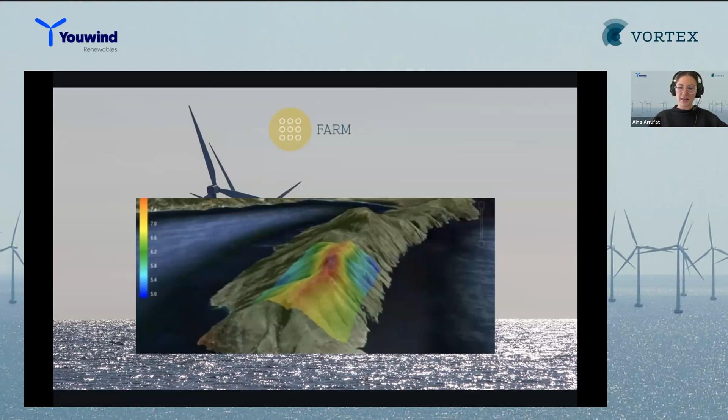This is our general portfolio where we can see that Vortex offers solutions for all the different stages of the project. And then let's move to Farm. Okay, our Farm, it's a wind resource grid at 100 meters resolution, perfect to use when the wind farm area is already selected, but not yet the turbine locations or their class. Let's see now a short video in the next slide.

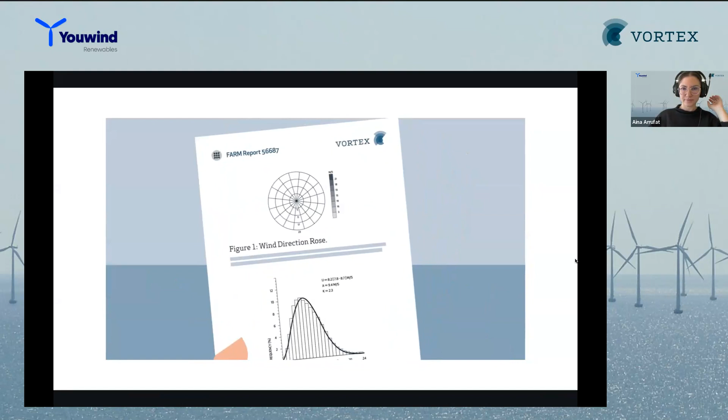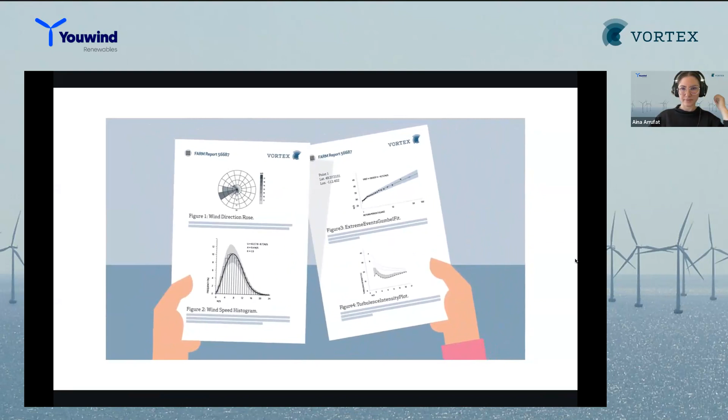Find out, using trustworthy data, which is the best site to channel your efforts and capital. Vortex offers high-resolution maps that include wind roses, wind speed histograms, and turbulence and extreme wind speed data at an unlimited number of points within the area. How? Through Vortex interface. Online, direct to your desktop. No software download required.

Click on New Farm, enter the coordinates, select the resolution, adapt the area, and submit the run. Once the calculation is ready, just click on Run, New Layer, Variable and Type, and then click Request. After just a few minutes, your layer will be ready to visualize and download in ASCII, TIFF, WRG, or KML format.

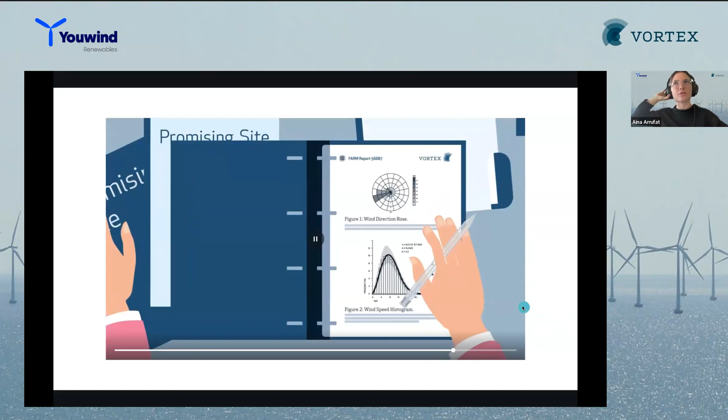So, well, the main important points for the Farm is that it's a WRG file that you can directly open with platforms like Youwind. All heights included from 50 meters up to 300 meters, 16 sectors wind direction rose, 100-meter resolution, characteristic turbulence intensity distribution in speed bands, areas up to 4,000 square kilometers in our Farm Standard, Farm Large, and Farm Extra.

And then this product can also be calibrated with measurements through our 3D remodeling technology, with measurements at different points, 1 turbine, 2 turbines, even 3 turbines, even different hub heights from turbines. And then the phrase to summarize the Farm is that it's a WRG file which characterizes the wind field gradients to compute the mean AEP. Then let's move to Series.

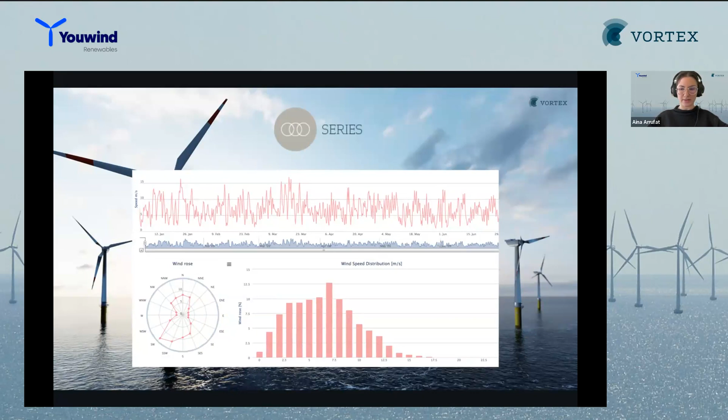Okay, Series is one of our classic products, hourly and 3-kilometer resolution, to use when local measurements are already available and long-term extrapolations are required. I have also a short video that shows Series. Maybe I will not keep all the video.

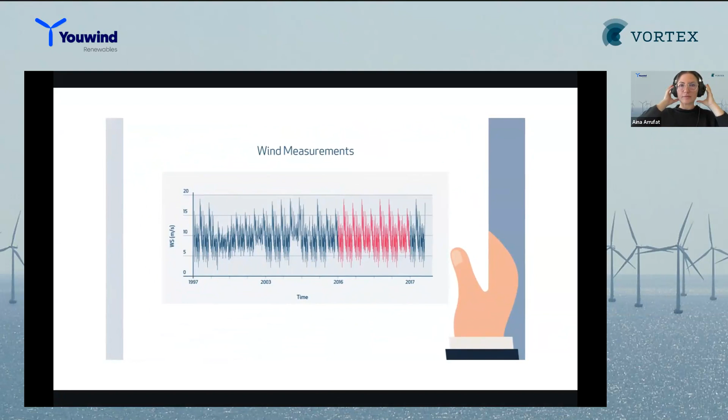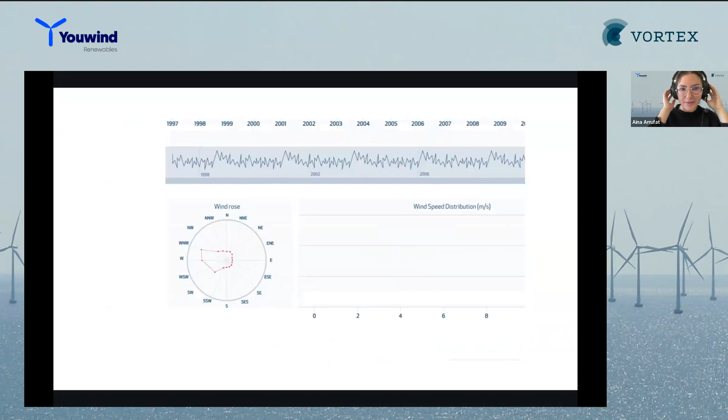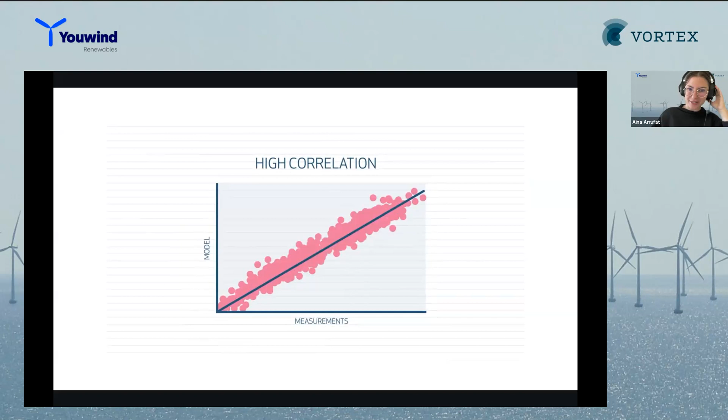Do you have 1 year of wind measurements but need a long-term view? Vortex offers up to 30 years of hourly time series of modeled wind data. Up to 30 years time series, modeled data, wind speed distribution, and different heights up to 160 meters. MCP method included in one series through Vortex interface, available worldwide.

Yeah, and this is the same process, you can directly download and request the series through the Vortex interface. So the main points for Series will be that the resolution is 3 kilometers and hourly. Periods available are 10 years, 20 years, and 30 years. We offer a 6-month free trial through our interface, and the selectable source can be NCEP, NASA, and ECMWF, and we offer these 6 months for free to check the correlations against your measurements.

Variables included are wind speed, direction, temperature, and pressure, and then the remodeling, which is the Vortex MCP, that can be requested directly also from the interface. And to summarize, Series contains the annual and seasonal variability that modulates the AEP along years and months. And then let's move to the last product, which is the LES.

Oh, sorry. LES, it's the most measurements-like set of synthetic wind time series to use to characterize the mean wind and turbulence across the wind farm. Now, I have also a video that shows LES. We have subtitles here.

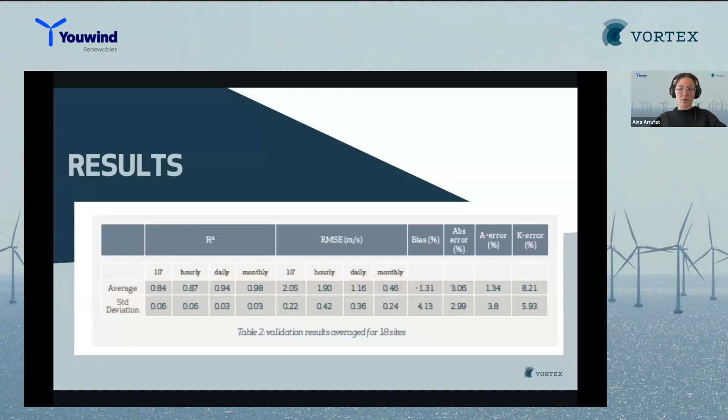And then from the Vortex side, that will be everything for today. And then let's move on with our colleagues from Youwind. Thank you very much. Thank you, Aina. Edvald, when you like. Sure. Thank you very much, Aina.

Very informative presentation, especially around the Vortex products and especially around the validation and calibration of your products. I think it's quite an informative package you have on your website regarding the calibration report and the different products, both for onshore and offshore. So I would encourage all the wind resource specialists to have a look there and see how that stands out for the various projects that you're working on.

So what I'll do now is share my screen here, and I will present some information about Youwind and how we use the Vortex products within our platform. So I'm joined here by my colleague Peter. Peter, feel free to jump in whenever I forget to say something about our product or the data sets. It's a lot of things to cover over a short amount of time, so there could also be some questions along the way.

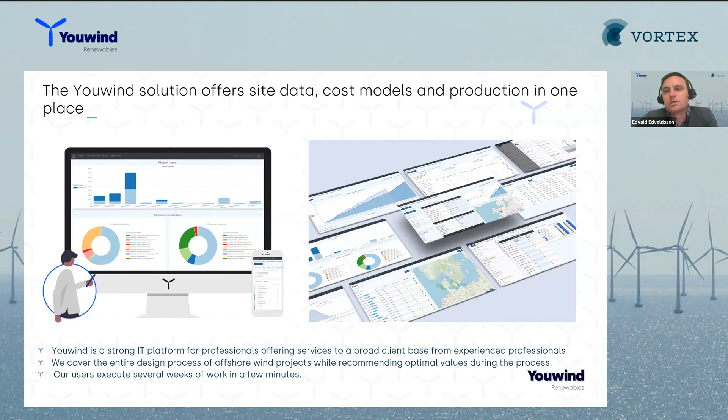And our basic users are able to generate yield estimates and overall project estimates over different sites in a matter of a few minutes up to hours, when normally this takes many resources and can take up to a few weeks. That is done today. I'll focus today on Pixel and Pixel Park.

So Pixel is our early stage screening tool, where you can basically accelerate your early stage screening with our interactive visualization platform. So essentially, it means that you can draw up a very big polygon wherever you want in the world. We will combine data sets from Vortex, meaning if you have access to the Vortex platform and have purchased some of their products and want to use them directly, you can see and screen directly where is the best place for you to have the wind farm set up.

And the most important thing actually for offshore wind farm development is wind speed. Without that, you don't have anything. It's like when you're trying to cook Spanish paella and you don't have rice. The wind speed is the most important aspect of your offshore wind farm project. So this is one of the things that we are very focused on.

So when you have a very big polygon, you want to analyze a very large seabed area, you can simply split the polygons up into very small pixels, as we call it. We will then generate the wind resource. We'll calculate the wind resource at hub height. We'll gather the bathymetry. You can add ground conditions and other human environmental restrictions into your analysis.

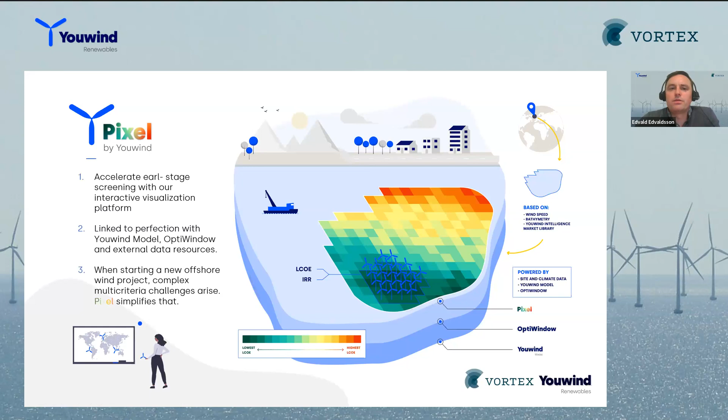And then we will calculate the levelized cost of energy and IRR for different locations. And from there, you can also jump directly into generating a layout and calculating your wake losses, and then continue with your analysis moving forward. So we're talking about LCOE, so levelized cost of energy. Levelized cost of energy is the lifetime cost of your energy project, essentially divided by how much electricity it has generated in the lifetime.

So cost and electricity generation are the most important aspects, and therefore the wind speed is obviously very important, but also other losses such as wake losses, electrical losses, availabilities, and the overall upfront cost of the capex, and the opex, the operational cost, also play a very important role when you're looking into offshore wind farm development. So the key consideration factors are obviously the wind climate, the wind rose, the different wind speed variations,

and the turbine spacing. And we'll go through how we generate a layout with an appropriate turbine spacing, so you can minimize the wake losses in the offshore wind farm project. The overall layout is basically dictated by trying to maximize the production, minimize the construction costs, and minimize losses at the same time, and you're obviously trying to meet the planning criteria.

So we'll show you how this works inside the platform itself, but basically when you're developing a wind farm, you need to take into account not only the wind speeds and the layout, but all the other different constraints you might have along the way: different pipelines, different cables, neighboring wind farms, Natura 2000 areas, military areas, and so on and so forth. So all these different human environmental constraints, for example, bird and bat corridors. There could be some noise limits,

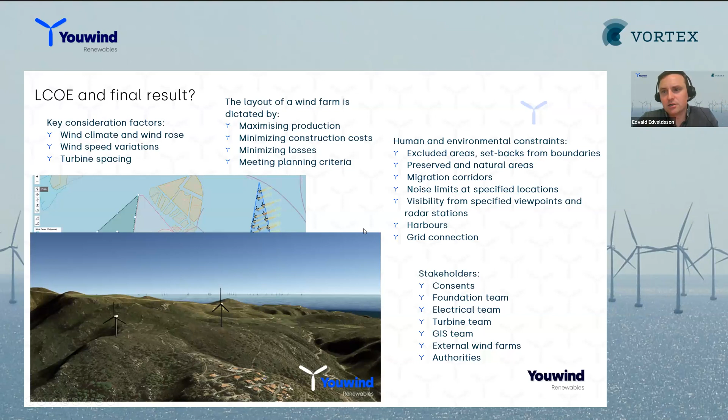And in the end, what we want to end up with is a visible wind farm where you can see how the turbines are set up, and essentially what's the overall production and the levelized cost of my wind farm. And from there, we start optimizing the different aspects of trying to minimize this cost and keeping the LCOE down as much as possible.

So this is a brief introduction to basically what we'll cover today. Then after this brief introduction to the platform and how we use the Vortex products, we'll also have a short Q&A covering the different questions you might have along the way. So from here, I'll basically jump into the platform itself.

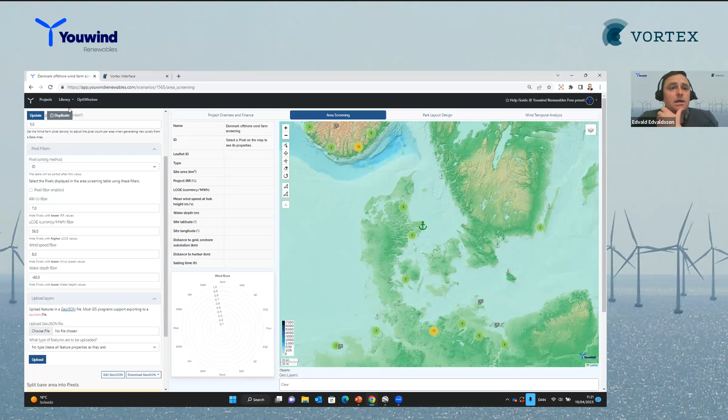The platform itself is basically a web-based solution. You can also have a look if you go to the Youwind website directly. You can simply go into the login part here on the right-hand side and go directly inside the platform. When you do that, you simply log in, and the interface looks essentially like this.

What we have combined here inside the platform is a very extensive library of turbines, foundations, vessels, cables, different harbors, onshore and offshore substations, and basically everything you would need when you're thinking about developing an offshore wind farm. If you think about constructing the offshore wind farm as Lego blocks, we will have all the different aspects here. And with the process of the platform, you will have the guidebook that will enable a very efficient way of constructing the most efficient offshore wind farm.

So we go into, for example, the first item here, which are the turbines, probably the most important thing when you're starting looking into the different aspects. It's an extensive library of different turbines where you can find access to power curves, thrust curves, and estimation of different prices. But obviously, all these inputs in the library can be edited directly by the users and used directly inside the project. So this is a very extensive preset library that has been calculated by the Youwind team, and then the users can add their different inputs directly and use them in their projects.

Same for foundations. You can choose between fixed bottom and floating. We'll focus on fixed bottom today for the Danish waters. Most of the areas there are suitable for either jackets or monopiles. But if you're looking into floating, then you can also go in and choose the different components, choose the mooring system type, for example, and the Youwind product will also calculate the different cost aspects with the mooring footprint, the mooring line lengths, and the overall platform calculations.

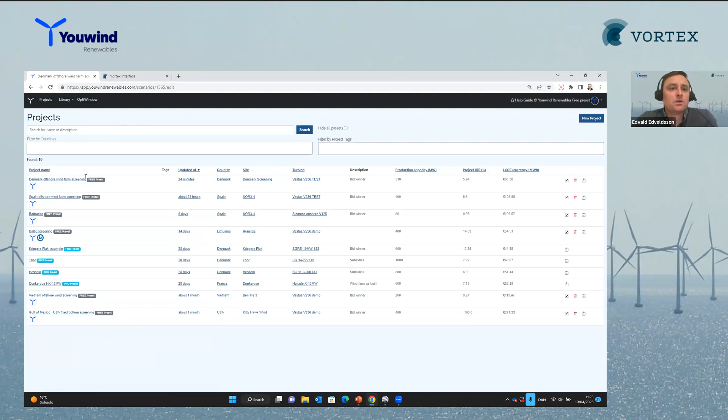With export cables as well, just to show you at a very high level, you can choose what type of connection you would like to analyze, AC or DC, and how you would add the areas inside the offshore wind farm project. The Youwind platform has the ability to calculate, by the engineering functions, the export cable lengths and the different losses with your settings. So we'll just jump right into it. Feel free to jump in, Peter, if you have a comment.

Yeah, here there was also a question from Bayram online: what about the inter-array cable? So indeed, depending on the density of your wind farm, the inter-array cable length is of relevance, of course. And when you make a layout, we calculate the array cable length and display that, and that's also covering floating wind farms. So you have a dynamic cable that connects the turbine to the seafloor, as well as a static part. Those are all calculations that are included in the Youwind package.

Yeah, thanks for that. It's a good question because it relates a lot to the different engineering functions that the Youwind platform has. You can use these engineering functions that are quite well explained, and for the inputs and the outputs, you can easily go in and see how they are calculated and validated with different reports that we have assembled inside. But the user can also choose to have their own values. So if there is, for example, a foundation team that would like to use a specific weight and a specific technical component of a particular foundation, then the user can use that value directly and ask the Youwind platform not to calculate the foundation weight, for example.

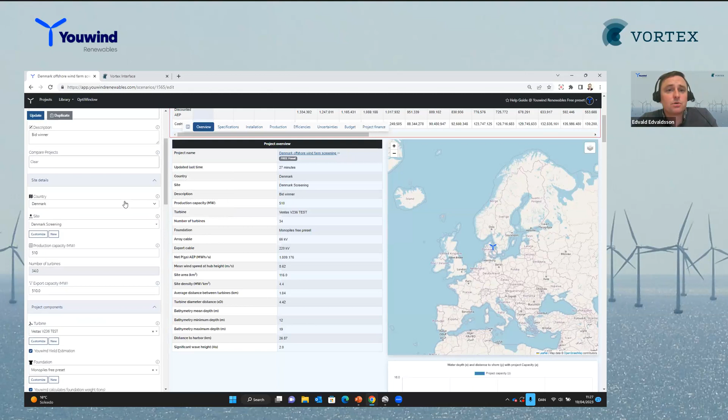So this is a way for the users to see if they would like to install one or two or three more turbines at the location, and to see what sort of export or curtailment losses there might be as an output for the particular project. And for very high wind sites, this could be interesting for the overall analysis. For now, we'll keep this the same, so we're not doing a curtailment or an overplanting scenario here.

So basically, what I would like to show first here is that you go into area screening, and like with the Pixel Park presentation I showed before, you enter into a GIS platform that essentially looks like this. The GIS platform is covered with all sorts of open source data coming from our market intelligence. So whenever you have access to the platform, you have access also to the different areas that are under development, or under a possible tender process, or under a sort of pre-development, as these ones here in Denmark.

But there is also added different types of information. For example, the existing wind farms you have, where they are located, and existing wind farm areas where you will have the different aspects, and also the different wind farm points, and overall everything you would need in terms of the initial GIS screening for your offshore wind farm.

So if you go into the platform right here, well, here we are in Denmark, and there are different projects around here, Horns Rev 2 or 3. If we're looking at the west side of the country, this new development area here, as an example, we will not cover an area that has already been developed by a developer. But if you have an area like this, for example, and you want to see what is the best way for a very big polygon to start making an offshore wind farm.

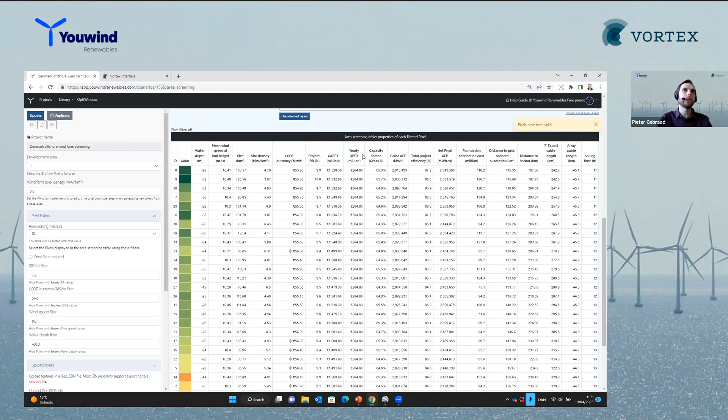Yeah, there's also a question online from Scott Love about the different cost components in the LCOE. For each of the pixels below, you will see the table, and also that it's split up. You will see the different assumptions going into the cost calculation, such as the length of the export cable, etc., and the foundation fabrication costs. But this even goes into more detail in the project overview, where you have an overview of the budget and also the assumptions going into that.

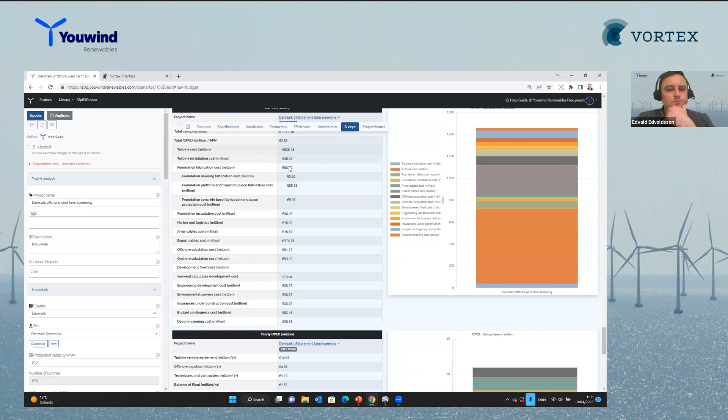And for each component, you can also adjust some of the assumptions that are going into that cost calculation. So you have a lot of freedom to also adjust your cost functions. Exactly. And all these cost functions can be edited directly and can be adapted by each user. So if you have a tender process where you have updated prices, from a turbine manufacturer or for a foundation package, you can also add that directly.

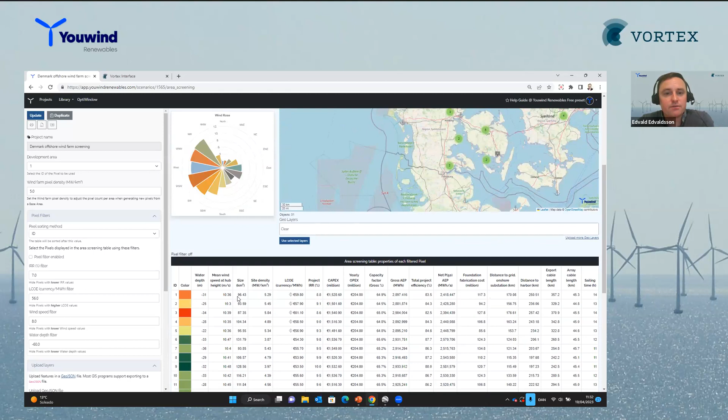So as you're mentioning here, for each and every area, we calculate the wind speed distribution and the mean wind speed at hub height with the different areas and all the different costs and technical components, including the total project efficiency. And this is extremely important as well when we're looking into the second part here, which is basically where we're going to connect this very big polygon to an onshore grid.

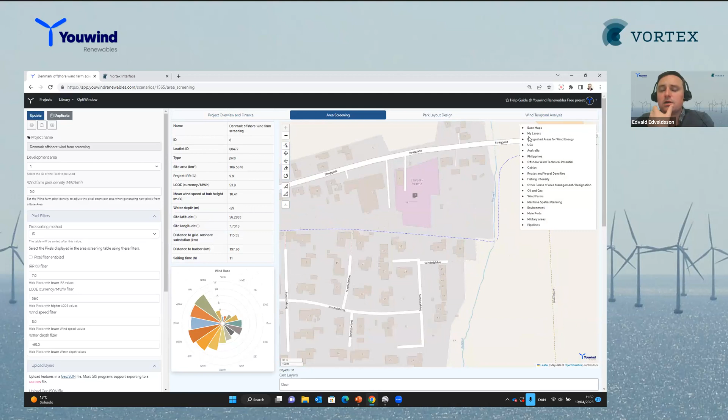So what we've included here is a worldwide database of onshore grid points. You can simply zoom directly in and see where these grid points are. And this is also part of the GIS layers we have, so you can see how these interact. And by simply saying, I would like to use this onshore substation to connect to my offshore wind farm, everything recalculates again, and you have the onshore point now right here. And here you can see the changes in the overall length and distance to shore.

And related to that is not only the cost function of your export cables linked to this onshore substation, but also the export cable losses. And this can be a very important factor when you're evaluating a very far offshore project. And for each of the onshore substations and locations, you also have access to the exact location, and can also edit or add the locations of onshore substations if you have more precise information for your particular project. That was a question from Pedro Piñón.

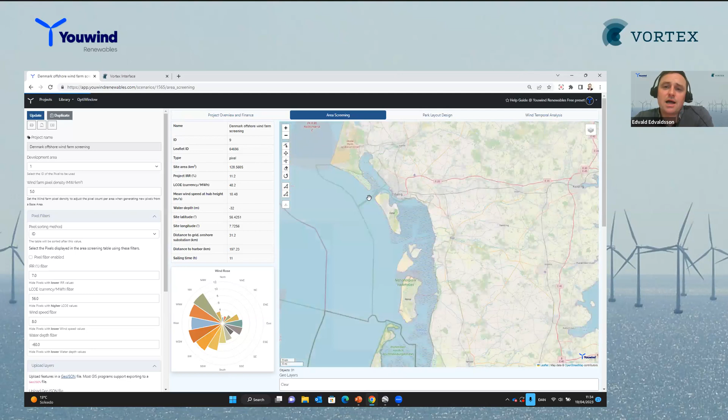Exactly. And same for the harbors. We have basically all the major harbors here that can be used for offshore wind farm installation and for operation and maintenance. By simply clicking on it, choosing the harbor, everything updates again, and you will have the calculations set up so that you have your onshore point, your harbors, and your overall production related to each area here. So this is like an early stage screening, with the different areas.

And what about the other part, which is basically the environmental impacts? So here we also have different GIS layers to choose from, showing what sort of environmental impact risks there are. Are there any Natura 2000 areas? Or are there any pipelines, for example, in the area? There are a lot of pipelines coming from the North Sea into Denmark that we need to take into account. And then the different power cables and communication cables that we also need to take into account.

So when you're screening the different areas, you can highlight which ones are the best areas in terms of LCOE, and which ones are essentially the ones that we need to adapt slightly in terms of taking into account the different human and environmental constraints.

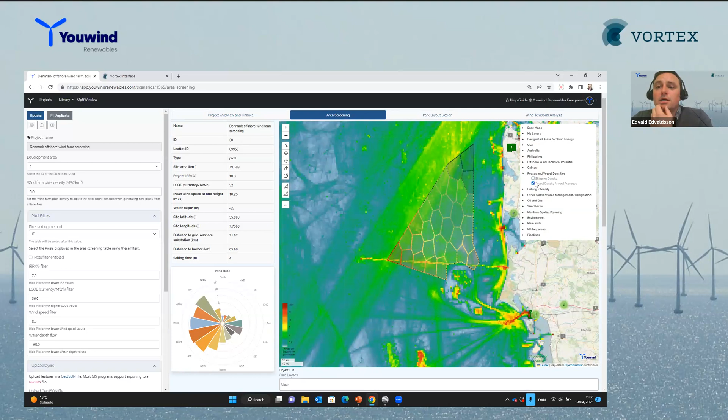You can also go in and see what's the shipping density for the different areas directly here, or you can also evaluate the vessel density and the fishing intensity as well. You can go in and evaluate what sort of fishing intensity historically there has been for this particular area. But just to show how this works in terms of creating a project.

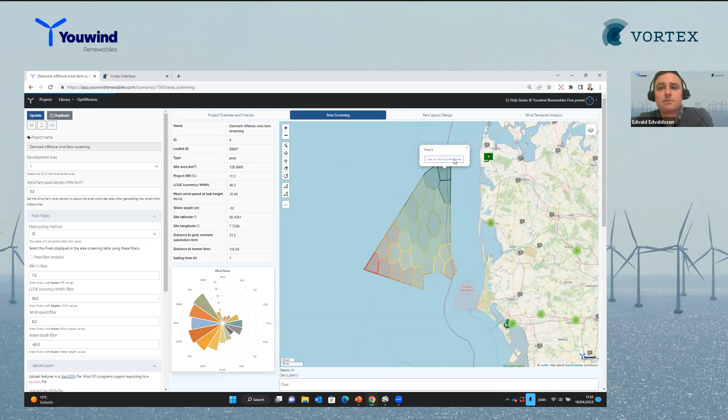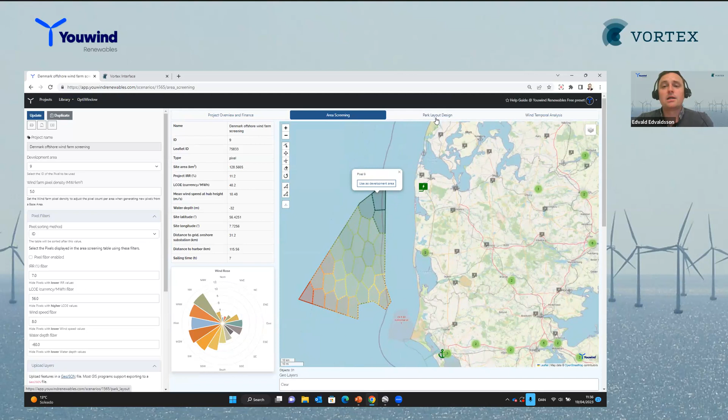So if you already have a pixel here, let's say this is the best LCOE that you found, you can simply say, I would like to choose this particular pixel here as my development area. And when you do that, you can already generate the initial layout. So the initial layout basically is this tab right here,

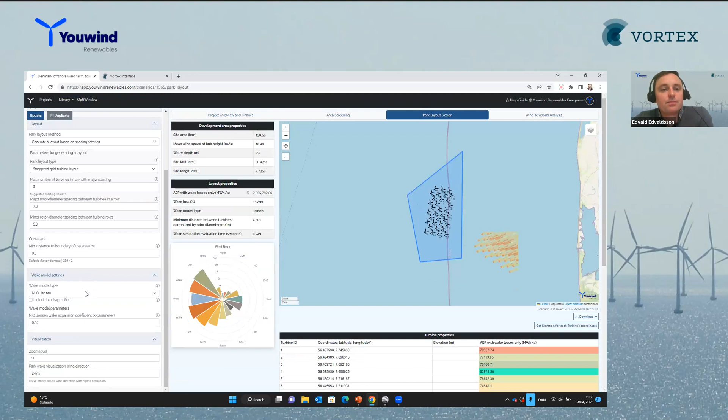where you can simply go in and, in a very easy way, choose what sort of park layout type you would like, what sort of spacing you would like within this wind farm, and what sort of wake model type you would like. And I'll let you, Peter, maybe explain a little bit more how this works in terms of optimization between staggered and a regular grid. Yeah, also I'd like to take one step back to reply to a question from Eric Simon.

In the area screening and for selecting the development area, we can add our own layers. You can add your own layers as a user, so you can be more precise about your area definitions, but also about particular constraint areas that might be relevant and that you might have more information on for your particular project.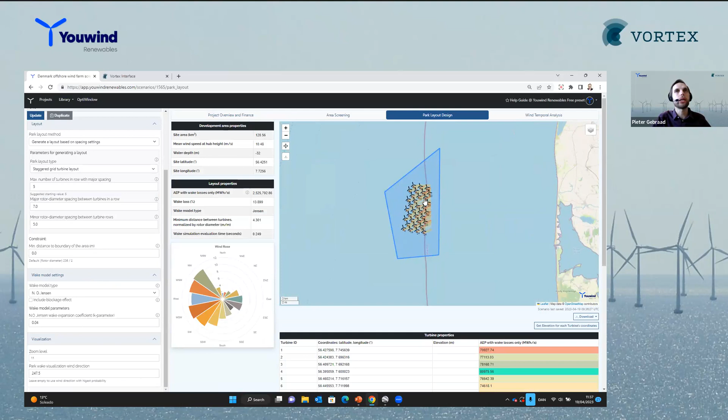Then for the park layout design, we have two different types of configurations that you can have. The very common ones, the staggered grid layout and regular grid layout, and you can set particular spacing settings for those. And then generate a layout automatically. What we do is we sweep the full range of rotation angles that layout might have, and make sure that it fits in the area that you selected.

And like Edvald is now showing, after you've made your gridded layout, you can also be more free in your layout design and direct the turbines. At that point, we recalculate the wake losses. Wake losses are calculated based on the N.O. Jensen model, but you can also use the TurbOPark model, which is a more advanced model that has been developed by Ørsted and has been validated with the operational data from their wind farms.

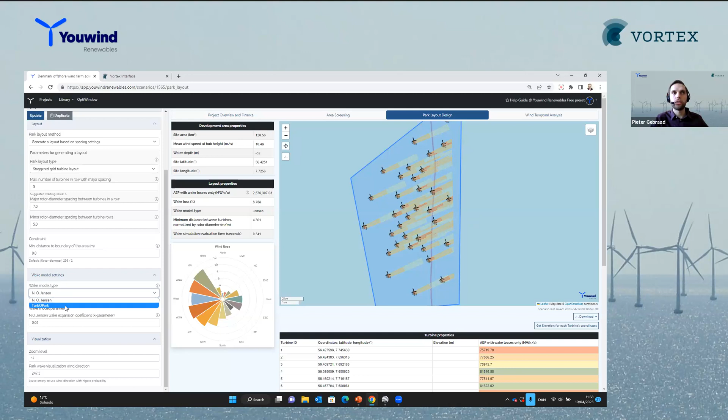So that's actually very interesting, because N.O. Jensen is an industry standard for calculating wake losses, but TurbOPark has more realistic wake profiles and is also becoming a more relevant model in industry.

Exactly. Perhaps this also answers the question in the beginning from Clement Atwood. How do you ensure that you're getting an optimal solution and not getting stuck in local minima when it comes to these layout parameters? For example, we do a full sweep of the rotational angle in order to find the true optimum. Of course, we constrict our parameter space by using grid or staggered layouts, but these are also very sensible and very common layouts to use. And we'll come with more optimization tools soon on this particular park layout design.

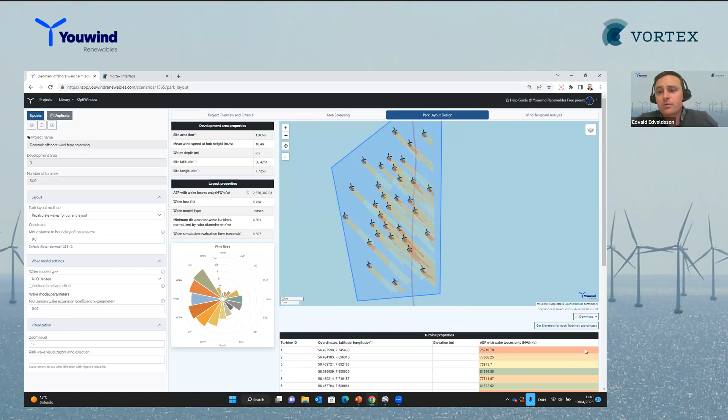So essentially, when you have developed this layout, you can also calculate the blockage effect, but that's something that we can go into in more detail on a separate occasion. I think we would also like to show in more detail in a separate webinar how you would optimize a layout from A to Z using both the Vortex products and the different optimization techniques that you have here with the Youwind platform. But just to summarize, when you have the layout design done, you calculate the wake loss, you calculate the blockage loss, you get the AEP with wake losses, and you can also get the elevation or the bathymetry per location.

So when you have that bathymetry per location already, you can also link that directly to your overall cost estimation. So we calculate everything per position, which is quite important when you're doing this sort of different type of analysis, and you're making sure you're minimizing wake losses, but you also need to take into account different restriction areas and not entering into areas where you might have different soil conditions or bathymetry that are not suitable for your area.

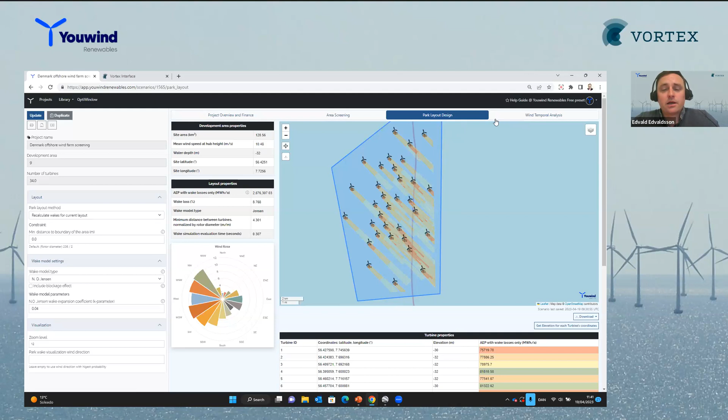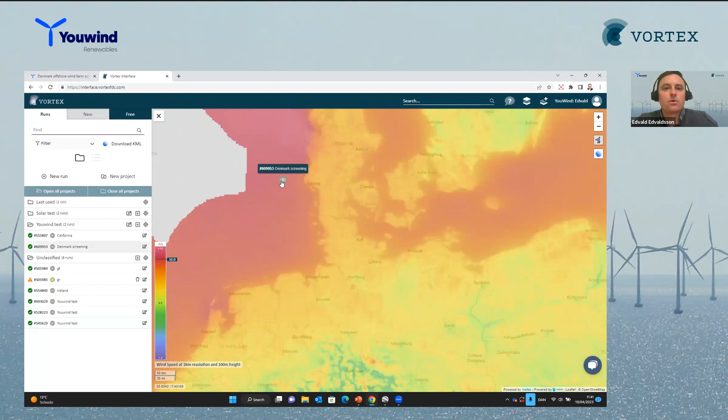So by calculating this, basically using the datasets from Vortex, we can also go in and see directly with a time series. We have an example here. So the way that the platform works is that we are directly linked to the different runs you have from the Vortex platform. So this is just a demo platform I have here, but all the particular runs I have directly linked here, I can use them for my offshore wind projects using the Youwind platform. So this time series, for example, is easily linked by logging in directly and showing my Vortex runs.

I can take in the wind series, and this can be a long-term corrected time series as well. We calculate the park average power. You can calculate per day or per hour, depending on the time series you have. But what we can do also is calculate the difference between the time series AEP statistics and the nominal wind speed that you would have on a 20-year variation that we're using for the other wind farm.

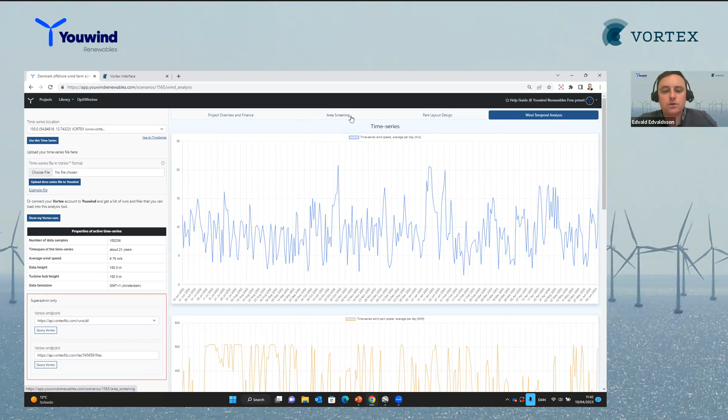So here you can see the different production, the seasonality of the production. You can see the production per year, and you can see how the cash flow changes in this particular example. And this can also be used when you have on-site measurements of already installed wind farms to see how they are actually performing per year, and how your wind resource assessment in the past has been operating.

As a final thing here, I would like to show the most interesting thing as well: one of the things we have inside the platform is not only the GIS layers here, we can also upload layers directly. I'll show you how that works, and this is probably a very common thing whenever a developer has an area they would like to see in more detail. You can go in and upload the file directly here. You can say, I would like to upload this development area. I can also draw it up directly and see how that is.

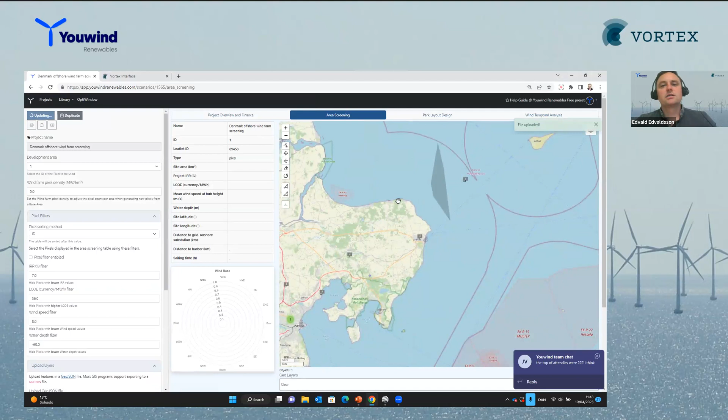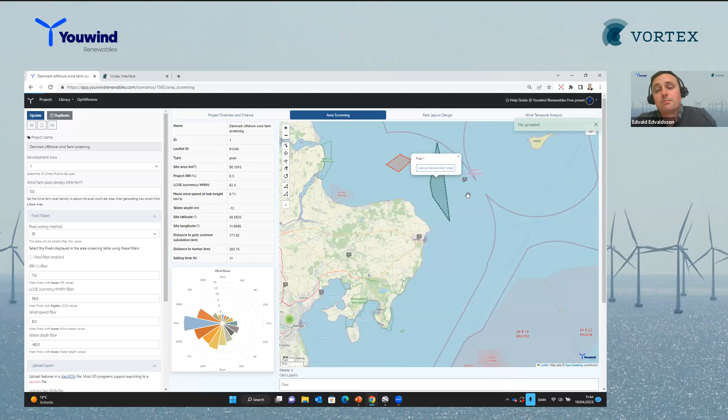So I can say I would like to choose a file here directly. I'll choose this screening here, and when I upload the file, I can get the wind data from Vortex directly. If I upload it, then I see that area comes up directly here. So for this particular area, I can simply hit update, and I will get the same information for this particular area as I did for the other screening. I can also draw up an area directly here, completely freestyle, and get the same information. And from here, you can basically say, I would like to use this area, and I can compare the two. This can be my new development area, and I can start making a layout directly from this area.

And from here, for example, we can also upload a layout. So let's say you have a layout that is coming from an external source that you would like to evaluate, you would like to see how this particular layout is operating, you upload that layout directly. The Youwind platform calculates with the wind distribution and the different losses how this layout is operating. You can see exactly how it is in terms of the other restrictions you have, for example, the neighboring wind farm you have here, the Anholt wind farm, and it's a very easy way to evaluate the different aspects of your offshore wind farm.

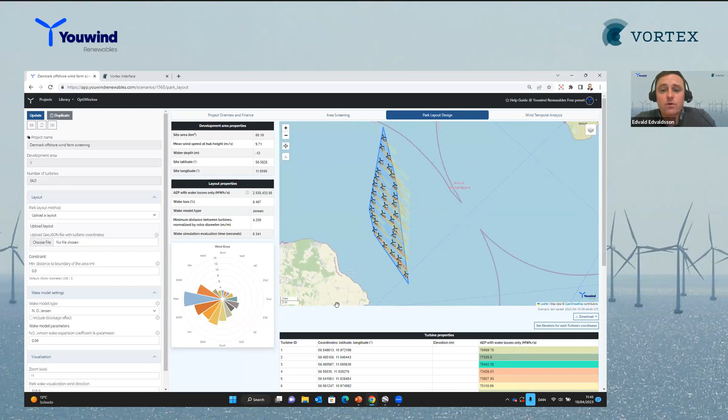And from here, one of the last things we've been working on, and very happy to say, is that whenever you have this particular area, you can also download this area or any other area you have, and this is essentially the output. So everything is downloadable directly to a KML file where you can see in 3D these different areas of the offshore wind farm, and you can see how the turbines are placed from shore, and use that directly in a permitting process, which is probably, for the WindEurope fair, going to be the most important one moving forward when we're discussing how we can accelerate offshore wind farms in Northern Europe.

This is going to be the most important aspect of this particular part. So that was basically the presentation I had up to now. Do we have anything else to add here, Peter, before we wrap up?